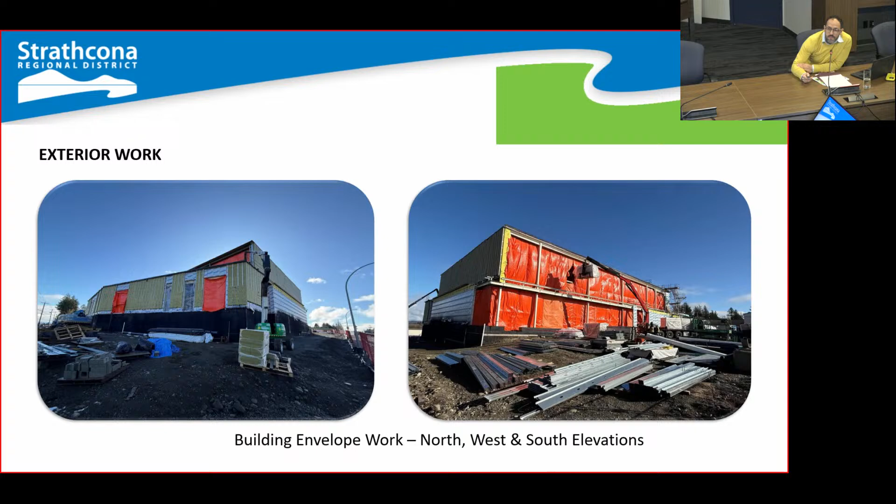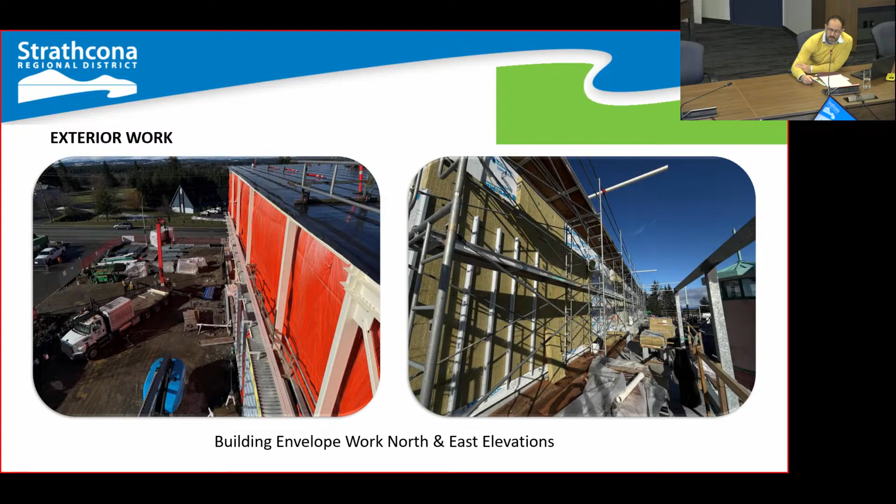The image on the left shows the insulation blankets being placed to maintain the temperature inside the building. That temperature is key for the pool contractor to do all the membranes, testing, and start installing the tiling. My hope is you get to see some of the tile work on the next tour. Right now they're finishing the work for the lap pool. The photo on the right gives a closer image of the insulation and the clips being installed to support the cladding.

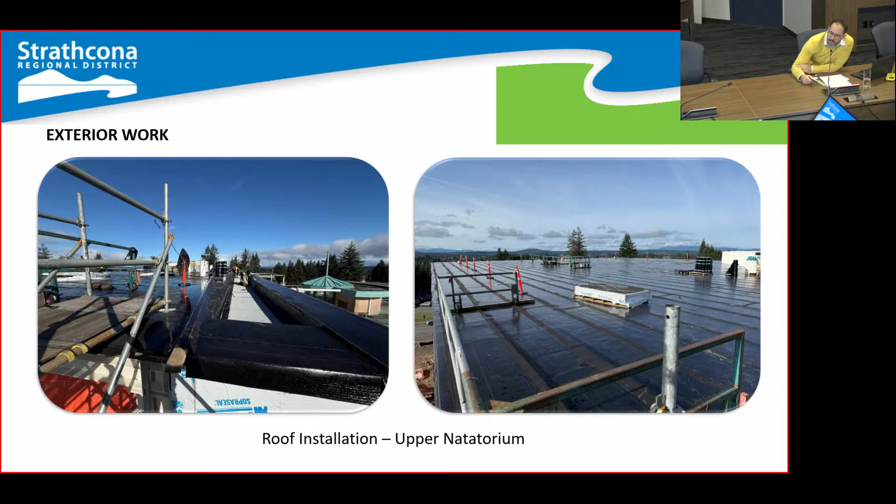Roofing work on the upper natatorium is almost complete. On the left you can see the last layer, the white piece in the middle being installed, which will go everywhere on the top roof. That's the granular layer that gives the final finish. On the lower roof, there's still a lot of work to be completed. It's weather dependent, so whenever we have a couple of good days the guys show up and do as much as they can, and when bad weather comes, we have to stop.

You can see some of the materials ready for installation - that's the insulation wrapped in green plastic. Installation of all the drains, and on the right you can see the peel stick membrane, the air vapor barrier that goes on top of the dense glass, the yellow layer underneath. If you look carefully at that photo, you can see the roof curbs being completed, and we anticipate air handling units 1 and 2 will go on the roof within the next couple of weeks.

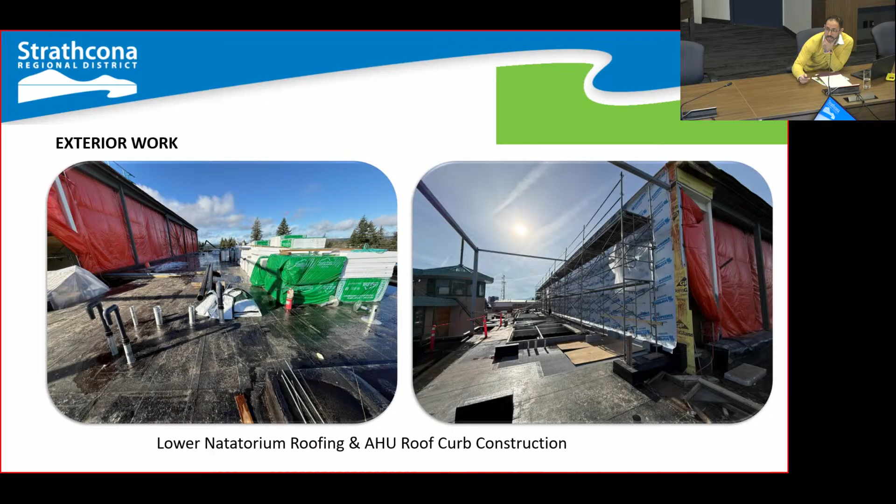This is a short video showing some of the progress in the lap pool. It looks orange because of the insulation blankets. I'm very happy to inform that the waterproof membrane has been installed. You can see all the construction joints are also being built. The next step is to fill this pool with water to do a leak test. If it all goes well, we start with the tiling. So here's the video.

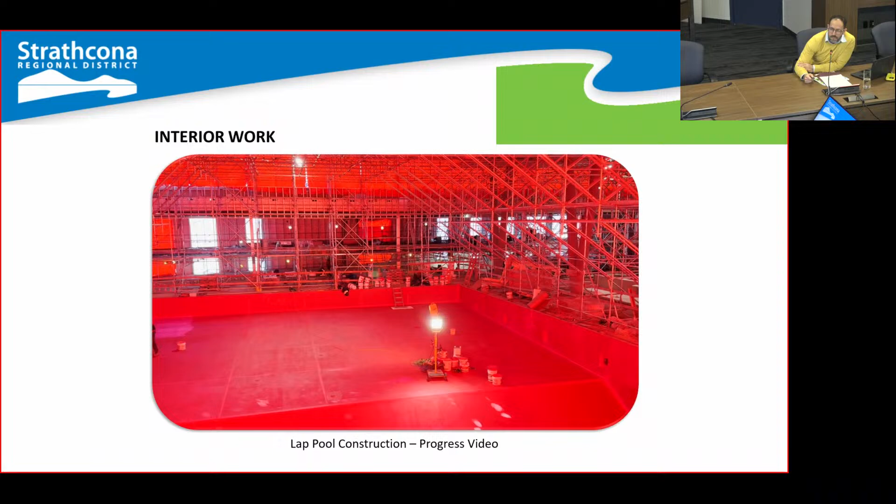The only guy working there didn't take his lunch because I showed up around the same time.

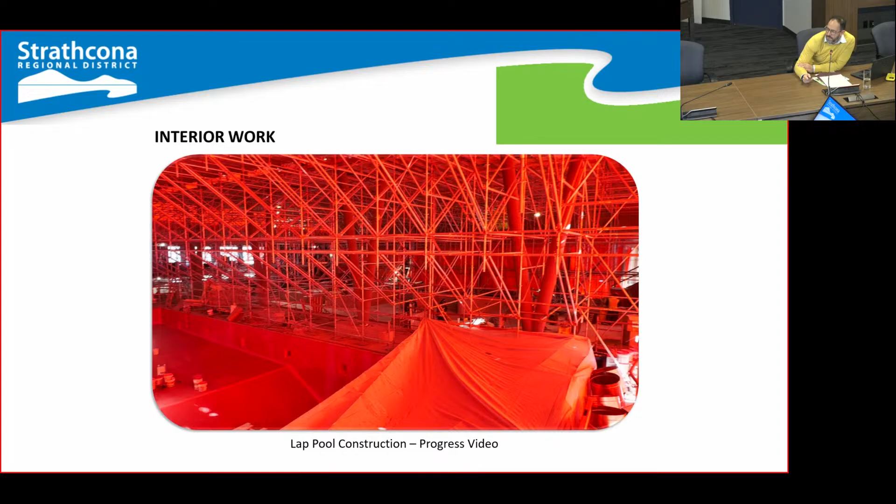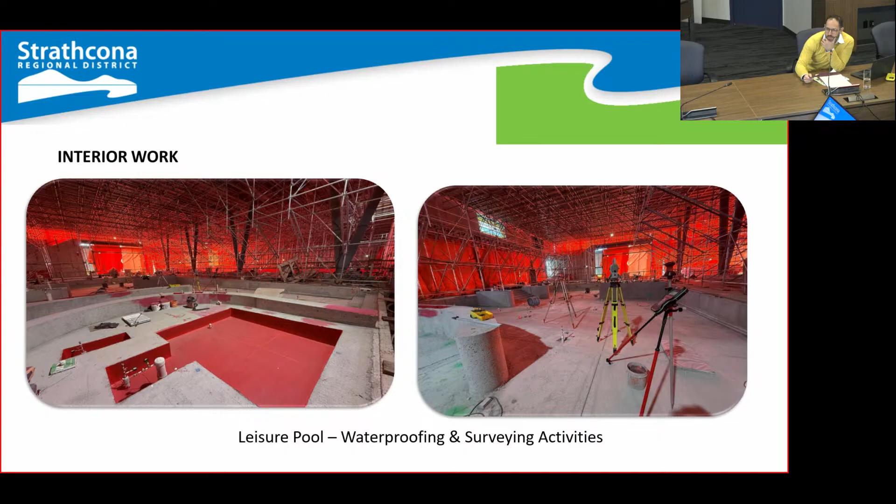Preparation of the leisure pool is ongoing. On the right image you can see all the survey equipment they're using to make sure it's very precise for the tiling. On the left, that red liquid paint is the membrane used to seal the entire pool. That work is happening and it's going really well. This will be the next pool to tile after the lap pool.

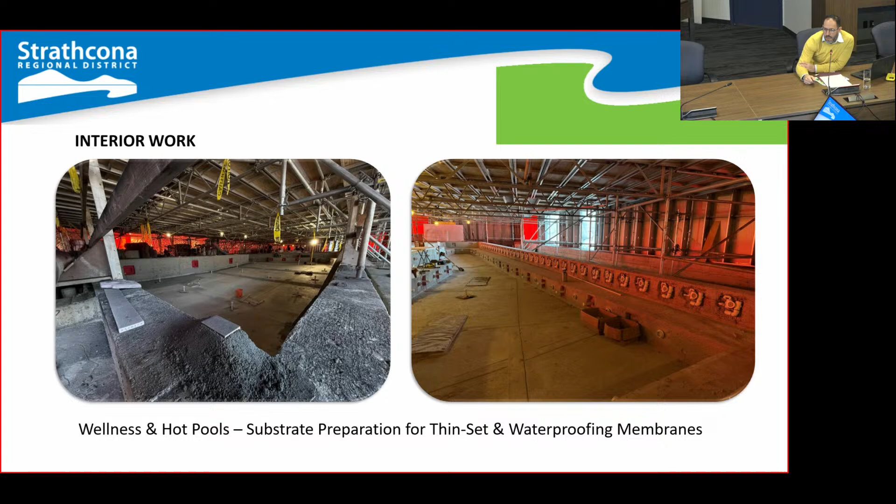The last two pools - the one on the left, the wellness pool, is under preparation. They've already started waterproofing, which you can see on the drain walls and floor drains. On the right, completion of mechanical work is happening; all the jets are being installed. They'll prepare this one as well for membrane, testing, and tile.

This is what's happening above the engineered scaffold system you saw in the pool video. All the structural systems - Q-deck, beams, columns, trusses, everything - is being painted. They've made incredible progress up there. The panels you see sitting on the scaffold system are the acoustic panels that will be installed pretty soon.

And then it follows with electrical, mechanical, lighting for electrical and other mechanical systems, HVAC, and as well the architectural finish, which is the linear panels. That work hasn't started, but all the materials are arriving to the site.

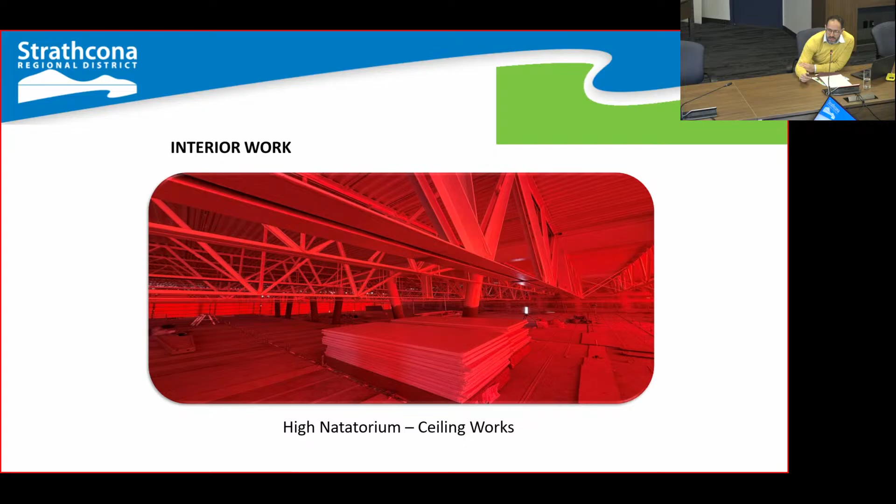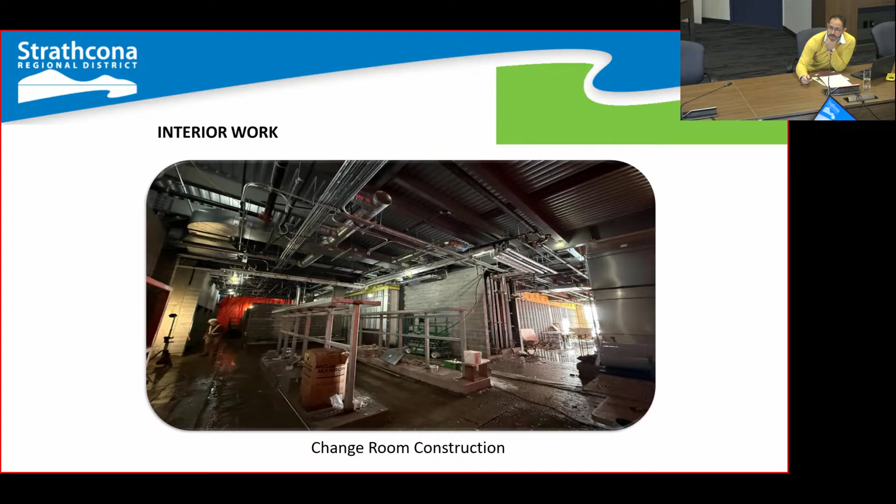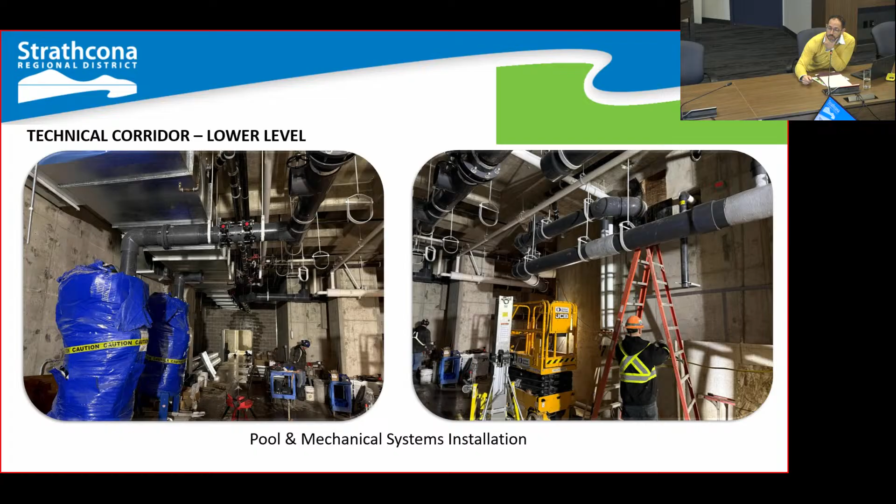Technical corridor, you can see a lot of the connections from the deck level. All the gutters are being connected to the lower systems in the technical corridors. On the left side, you can see those pieces that are wrapped right now in blue — those are the filters, part of the pool filtration system, and you can see that those connections are being completed. On the right side, you can see connections happening from the gutters into the storage tanks. So a lot of work going on at the bottom too.

And a small another video that I made of the lower corridor, just to give you a better idea of the amount of piping that is related to the pool systems and mechanical, all HVAC and fire suppression that is going on there.

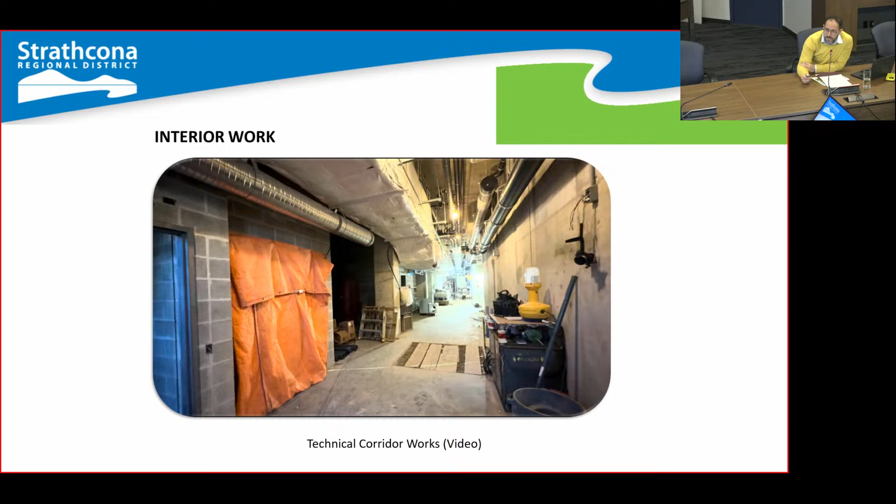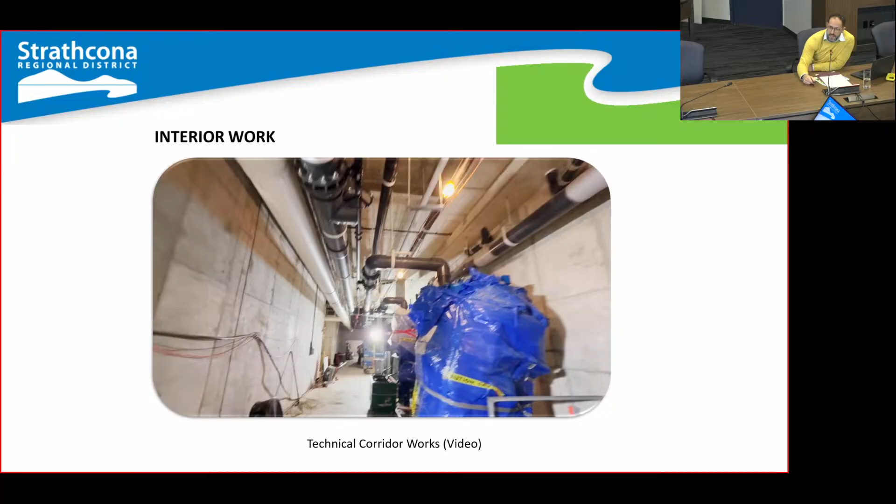So the rooms that you see on the left side are the mechanical, chemical room, and electrical. Now getting into all the supply and return pipes, you can see a lot of fire suppression. Those, again, the filters on the right side.

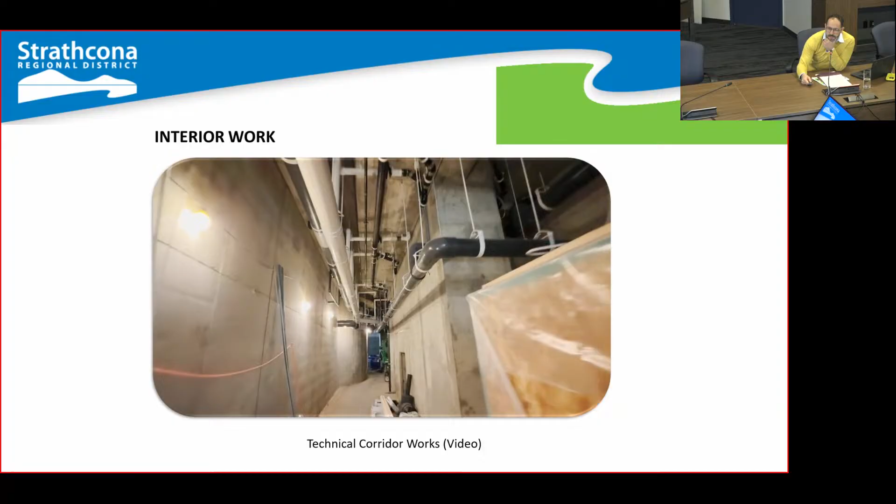I'm hoping to show more systems, UV and all that stuff that still has to arrive. But yeah, definitely these spaces, these corridors are filling up with an incredible amount of materials.

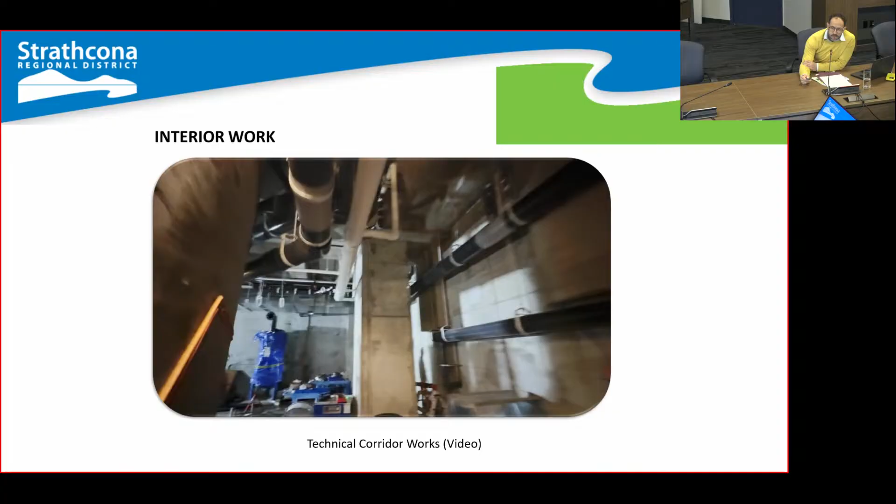Okay, upcoming and ongoing activities: the exterior wall assembly continues in preparation for cladding and also the windows. We anticipate that these materials will arrive in March and installation will commence the same month. Air handling units installation is scheduled for March as well. Lower and upper roofs completion in April 2026, again weather dependent.

The thin set membranes and the testing for all the pools starts in April — I'm sorry, it's going to go until the end of May. The lap pool tiling is scheduled for next month.

Mechanical and electrical and painting, acoustic and architectural ceiling panels is still ongoing. Mechanical and electrical rough-ins and masonry walls in the change rooms continues. All electrical, mechanical, and pool equipment in the basement corridor as well continues.

Right now we are procuring a lot of the owners' components for the building, anything related to wireless access points, the commissioning authority, security, keying, and a few other components, the pool as well, the pool equipment. All that stuff is ongoing right now, and we anticipate that within the next two months we will have hired all these people to do the work, and we will have a supplier for all the pool equipment.

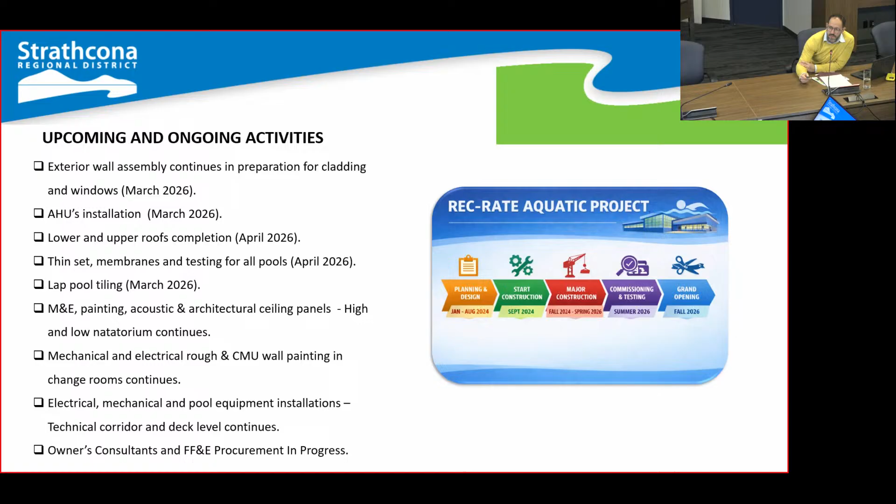So the project right now is on schedule.

Budget status. I have separated that in my previous presentation from the new construction of the Aquatic Center from the renovation, so $52.3 million out of $69.8 million is part of the aquatic, and the renovation, which is phase 2, starting in September 2026, is $17.5 million. So looking at the books, we have a contract with the builder for $61.4 million. This includes all the change orders that have been approved to date.

We have $32.4 million, that included the progress claim for December 2025. We have received the progress claim for January work that is under review right now and is anticipated to be approved within the next few days, for a total cost of $2.6 million.

We have a contract with the prime consultant, ACMA, the sub-consultant team, all the engineers, for $1.38 million, and we have paid so far $794,000. We also have owner's costs, all related to testing agencies, funds for contingencies to cover all the change orders, and owner's consultants — anything related to geotechnical or like the commissioning authority, for example, will come out of this budget. It's $7.02 million. We have spent $667.5 thousand.

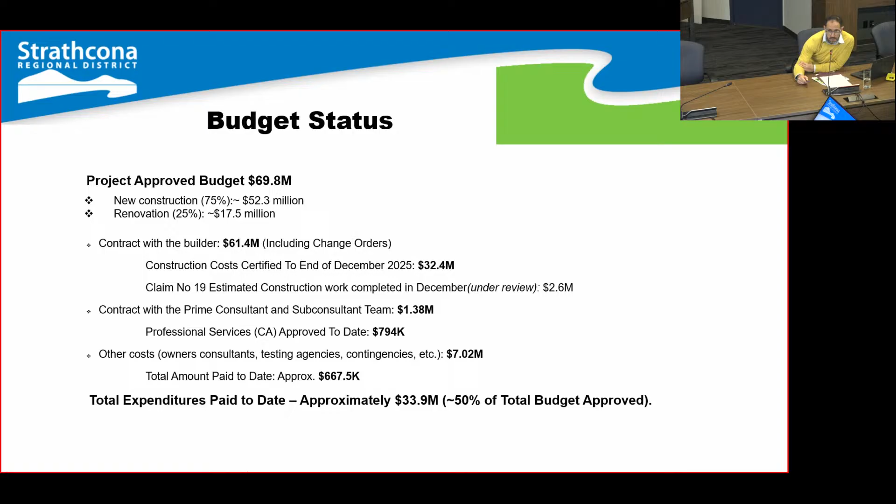Total expenditures that we have paid to date is $33.9 million. There is a variance between this amount and the one that I included in my staff report. I apologize for the mistake. It's small, but $33.9 million is what we have processed, approximately 50% of the total project budget. The project is within the approved budget. I spoke about the tour, and with this, I finalize my presentation, and I'm happy to respond to any questions you may have.

Well, commissioners, any questions? Oh, yes, Commissioner Kerr. Thank you, Chair, and thank you for the presentation, Wolf.

Just remind me, what kind of water treatment system is it? Is it a typical chlorine, or is it UV, or what are the... Yes, thank you for your question. Let me just see if I can refresh myself. There are two different systems, a primary system and a secondary system. The secondary system is UV, and if I'm correct, Robin, perhaps you can help me with this, I believe the primary system is chlorine. Is that correct? Yeah, the primary system's a chlorine puck system, so it's not liquid chlorine like we currently have. And then UV is the secondary treatment, that process is done as the water is pumped through before the filters.

Anyone else? Well, I was noticing, maybe I should have noticed it all along, there's a lot of stuff in the underground services, and I'm just wondering, is it easily transferable for staff to operate the new place? Is it easier because it's all modern and well marked? Is it going to be a lot of training? I'm just curious.